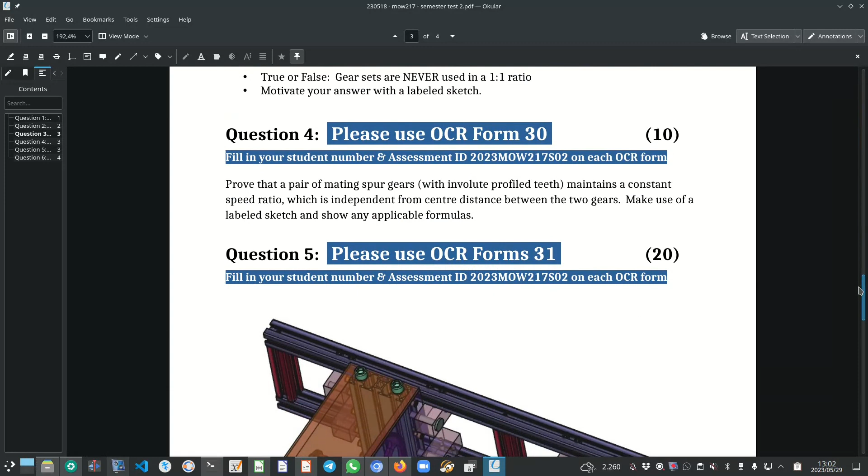This video is just to discuss the recently written MOW217 semester test 2 and specifically question 5. So if we scroll down and have a look at question 5, here you can see figure 2, the test frame with a single Shigley Hauler gearbox. This is the test frame or portion of the test frame. It's this frame over here, and the single Shigley Hauler gearbox is attached to the frame.

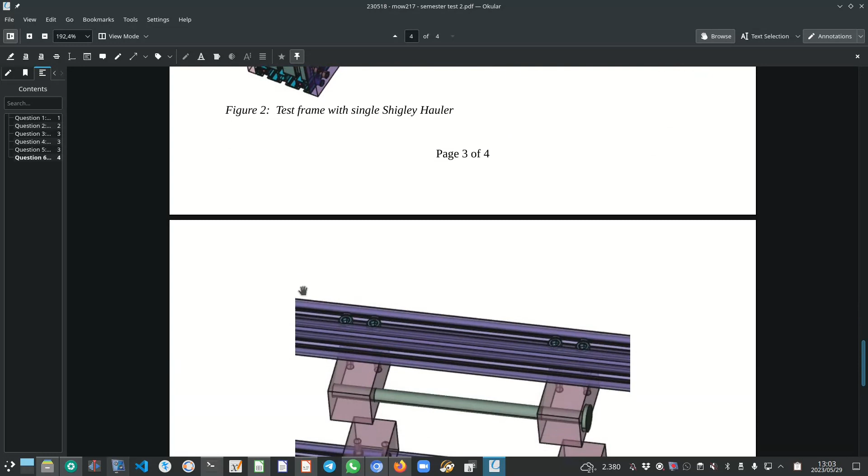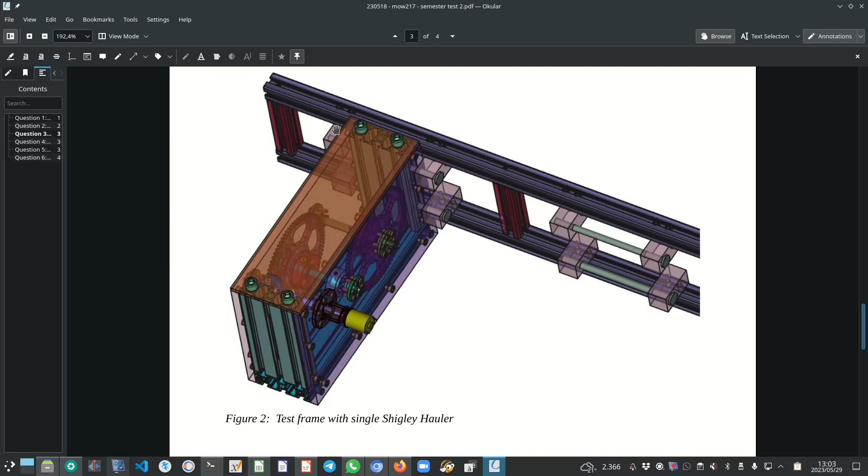Okay, and what I'm showing here is a close-up of the guide blocks and mounting pins. So these 4 blocks are the guide blocks, and then these 2 pins are the mounting pins. And if I go back to figure 2, there are those pins, you pull them out and you put the Shigley Hauler gearbox in position, and then you push the pins through the holes that are drilled in the Shigley Hauler gearbox, and the pins obviously engage with the opposite guide blocks, and that secures the Shigley Hauler gearbox in position.

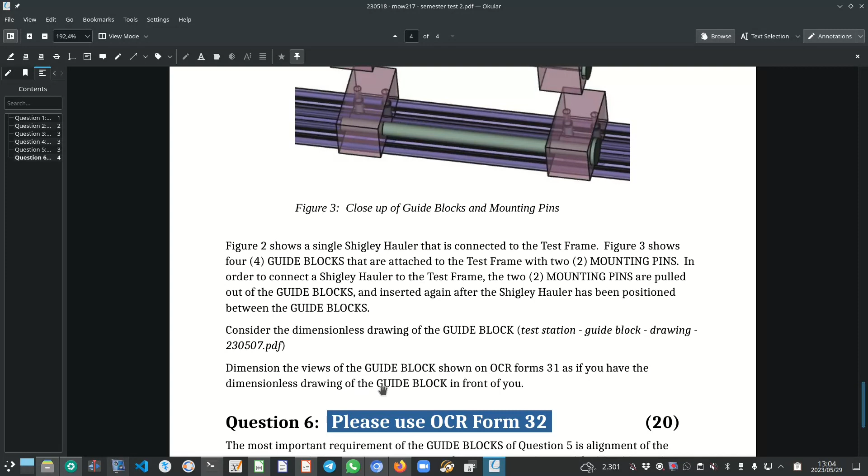Okay, so if we go through the question, figure 2 shows a single Shigley Hauler that is connected to the test frame. Figure 3 shows 4 guide blocks that are attached to the test frame with 2 mounting pins. In order to connect the Shigley Hauler to the test frame, the 2 mounting pins are pulled out of the guide blocks and inserted again after the Shigley Hauler has been positioned between the guide blocks. Now, consider the dimensionless drawing of the guide block, and the instruction is to dimension the views of the guide block shown on OCR Forms 31 as if you have the dimensionless drawing of the guide block in front of you.

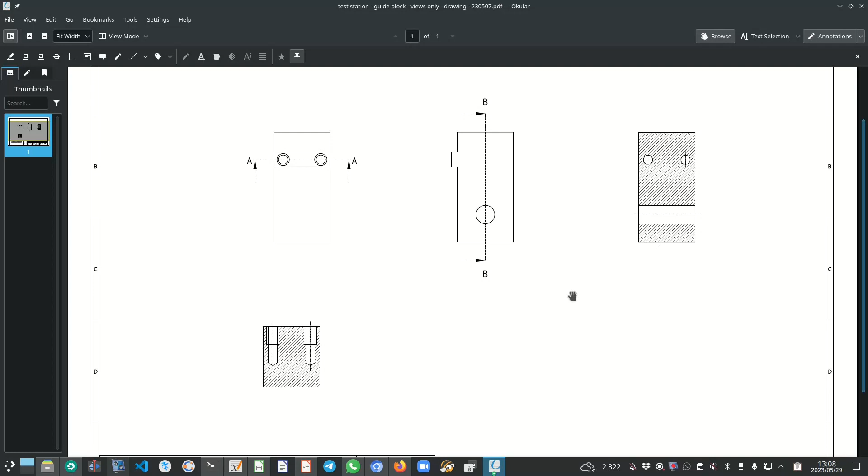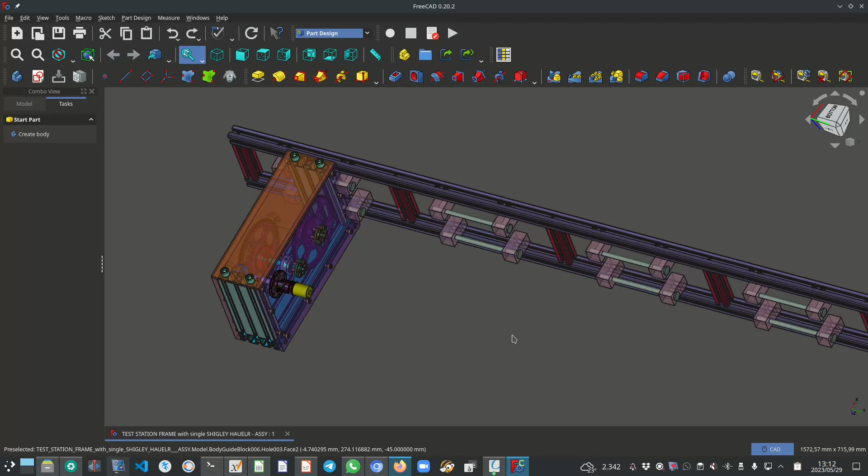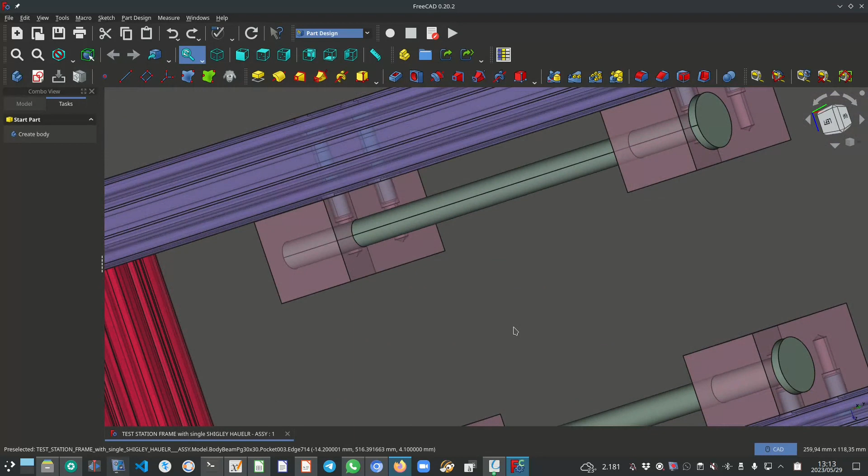Okay, so what you see on the screen at the moment is the single Shigley Hauler on the test frame. And if we zoom into the mounting block, you can clearly see that there's an extrusion that interfaces with a slot in the aluminium extrusion, and there are 2 fasteners, cap screws, that hold the mounting block in position, and then these holes for the mounting pin, that need to line up obviously. So this is the guide block.

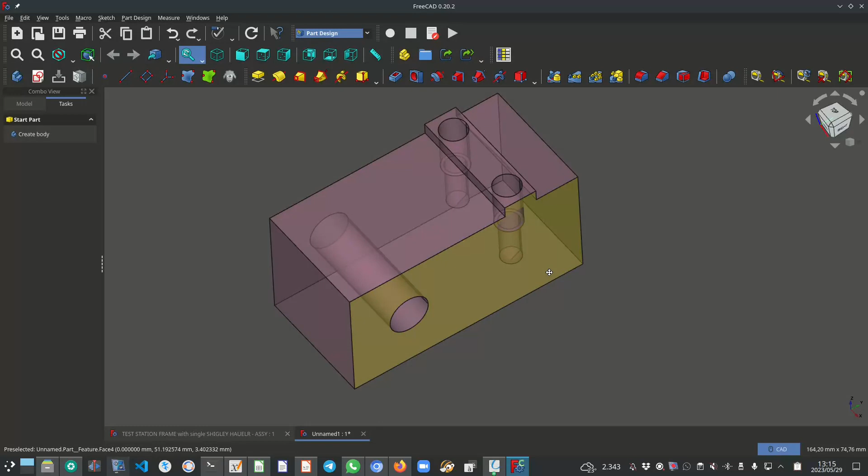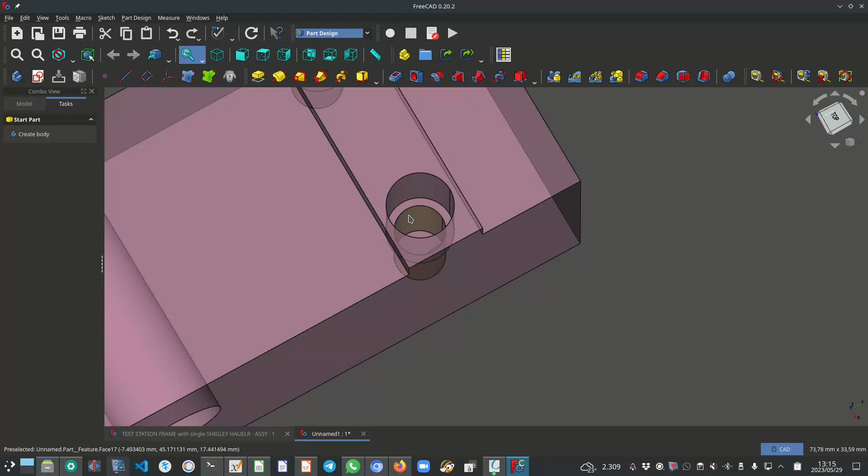And as with all the other practicums and tests that I submitted, this is how I indicate the tapped hole. The drilled portion of the hole is indicated here at the bottom, and the tapped portion is concentric to the drilled portion but is slightly bigger. Okay, so to start, it follows that this hole is an important feature. It's important where it's located relative to this surface and this surface. It's also important where the hole is located relative to this extrusion.

Okay, so it follows then that for our datum reference frame, we will specify this surface as datum A. And because it's 2 separate surfaces, we link them with a flatness specification as shown here. The letters CZ after the flatness specification refer to common zone. So in other words, our tolerance zone is a single tolerance zone consisting of two parallel planes a distance 0,03 apart. I've made the tolerance quite tight, 30 micron, and that's because the alignment of the block is determined by those two surfaces.

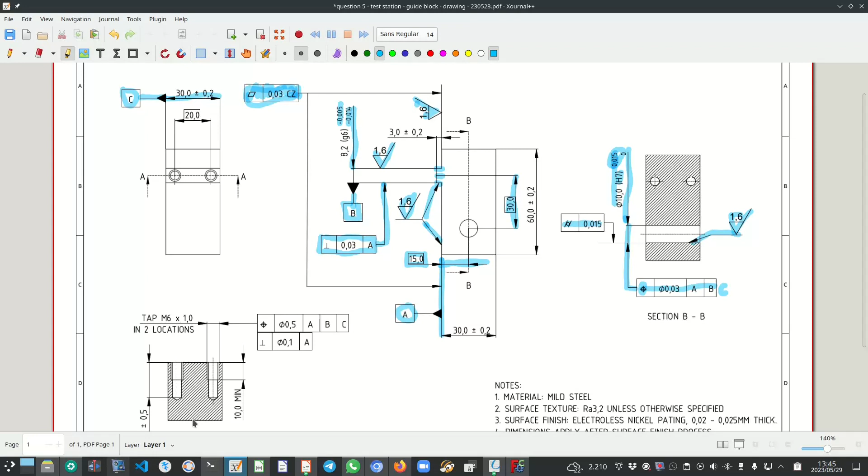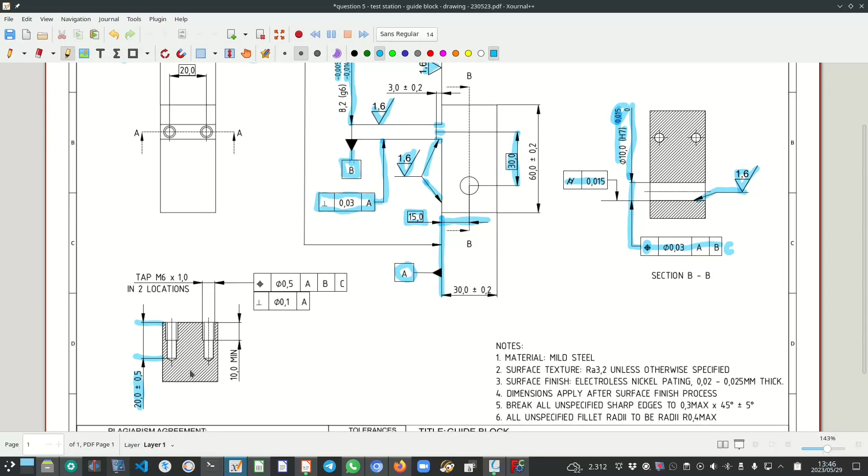The next question on the memorandum: are the two M6 tapped holes correctly dimensioned? If I can just scroll down a little bit, that's the tapped holes over here. We need the depth of the drilled hole, and that's 20 plus minus 0.5. What's important here is you dimension it from that surface, and you don't use the tip of the hole, you use the flat portion of the hole. So that's the depth of the drilled hole.

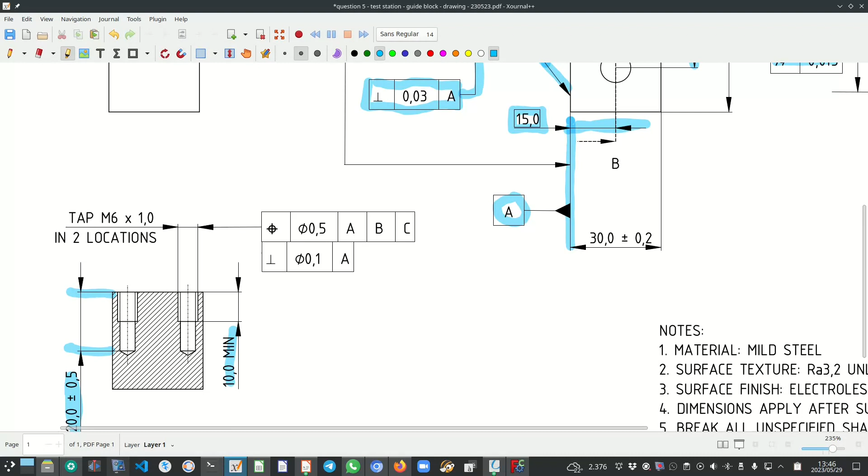The depth of the tapped hole is measured also from the top surface to where the tap portion ends, and here you could have a plus minus tolerance or specify it as a minimum tap depth. Then what I did here is I said tap M6 by 1, so the 1,0 is the pitch, in two locations, and I specified it as a positional GD&T, a relatively loose tolerance relative to A, B and C.

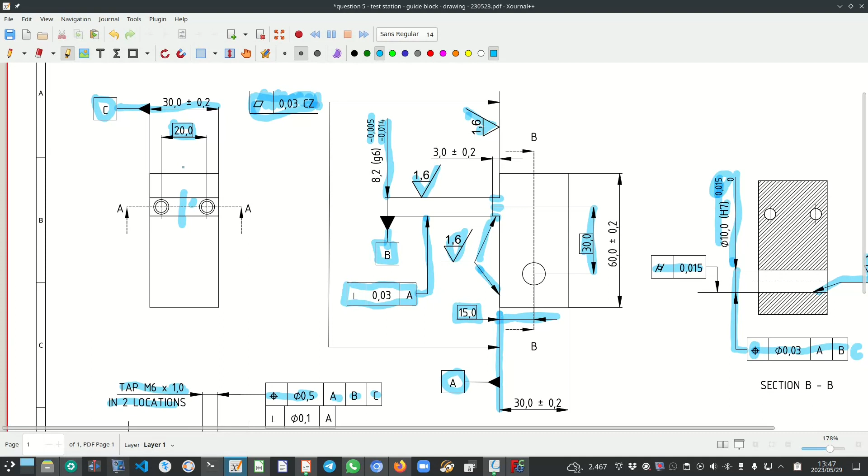C is important here because this theoretical exact dimension of 20 millimeters implies that these two holes are symmetrically placed about datum C. So it's 10 millimeters and 10 millimeters. This is how I've indicated it. I think it would be misleading or confusing if you now add a line here and give the two 10 millimeter dimensions. So I think this is more elegant and it is straightforward to understand.

Lastly for the tapped holes, because this tolerance is quite loose, diameter 0.5 millimeter, I've added the perpendicularity of diameter 0.1 with respect to datum A, the top surface. So I want the holes to be perpendicular to within a diameter of 0.1 relative to datum A.

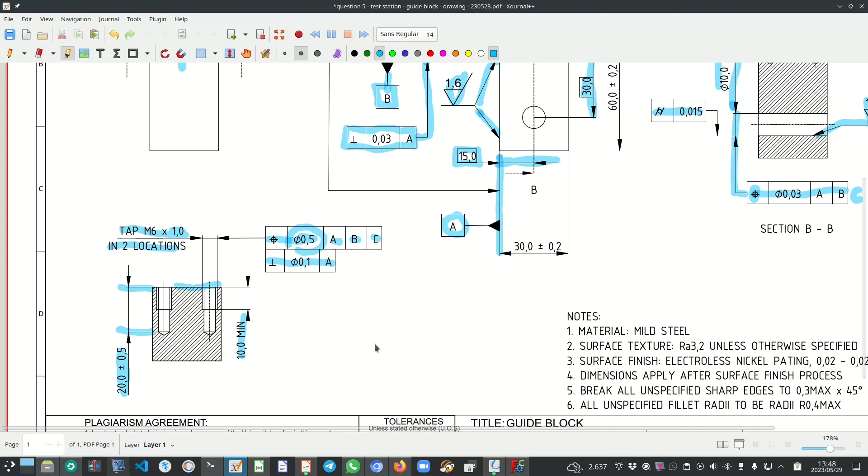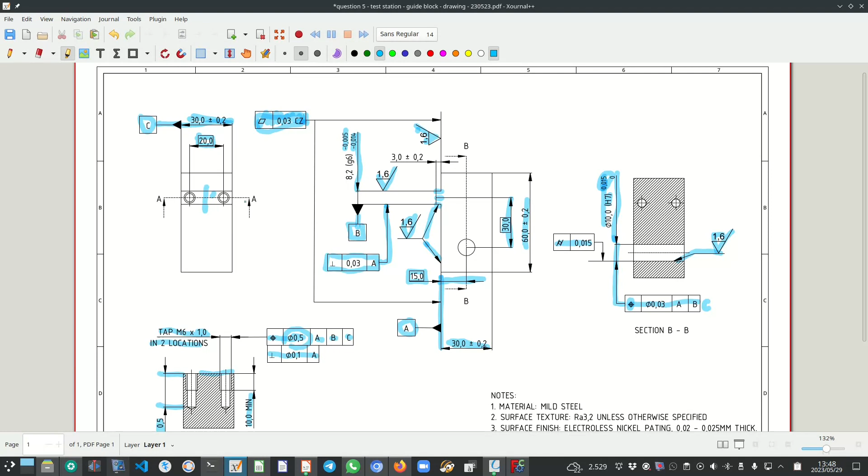Then there's also a question: are the overall dimensions given? This is the overall length of 60 millimeters, this 30 millimeter dimension, as well as this 30 millimeter dimension over here. That's also needed.

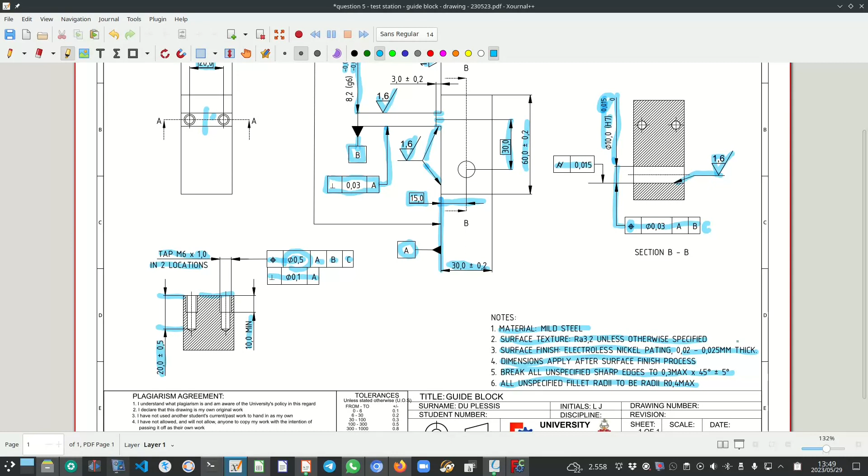And that really concludes. Sorry, there's one more overall dimension, and this is this 3 mm plus minus 0.2, which is the height of the extrusion. So thank you very much for watching.